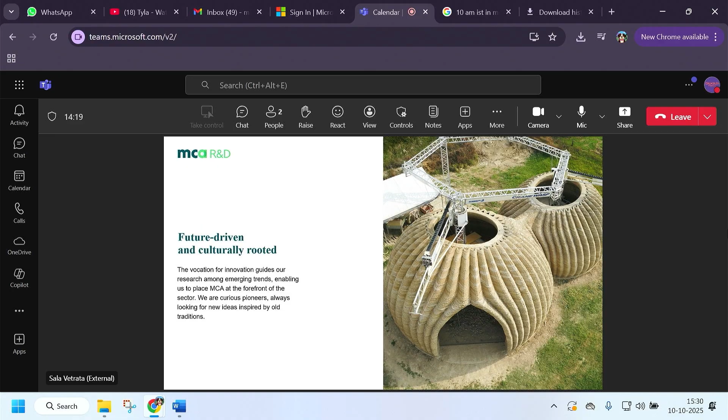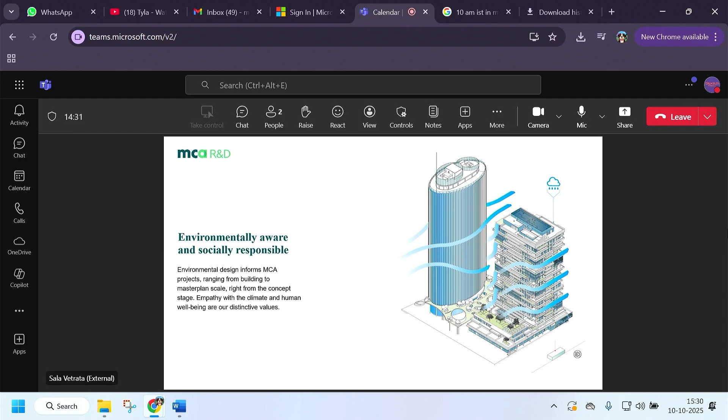Of course, one other main part of our work inside the unit is to make all the environmental analysis and all the integrated design that we need when we design buildings and master plans in our cities. So in that sense, we can say that inside the office, the research informs projects. So we help our colleagues that are working on projects, and in a sense, the projects are inspiring us for new research. So it's a continuous loop where we work with the others in order to increase the potential of our design.

Let me show now some projects that we developed in the last year, and I think that we can go deeper in what I said at the beginning. So the creation of an ecosystem with a sort of biodiversity of buildings. The first one is Tecla. It is a project developed together with WASP, an Italian company that produces 3D printers, and it was developed across the COVID in 2020. It was a prototype.

And to do this, we started by taking a look into what, at the time, all the research and the research institutes were saying, so that thanks to 3D printing, we can reduce the time, reduce the cost of our building, having more flexibility in terms of design, reduce the waste, and of course, reducing emissions and injuries. So everything was showing us that potentially this could be a technology for reaching the zero footprint of our buildings.

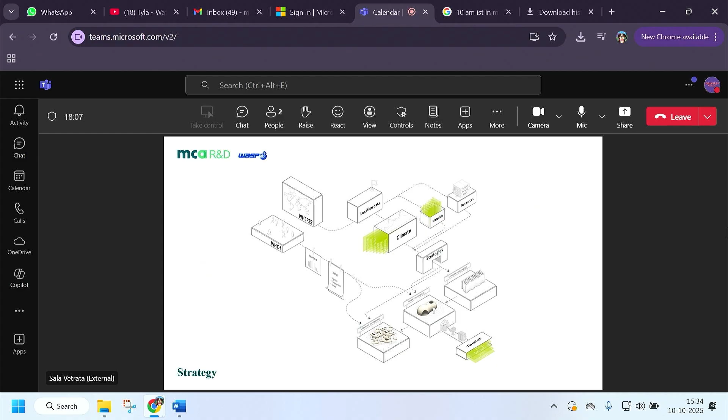By using the location, we extract the climate, the materials, and the resources that we can find in the context. And with this, we develop strategies. With all these strategies, we develop a bottom-up solution that, starting from the wall, can arrive at a final master plan.

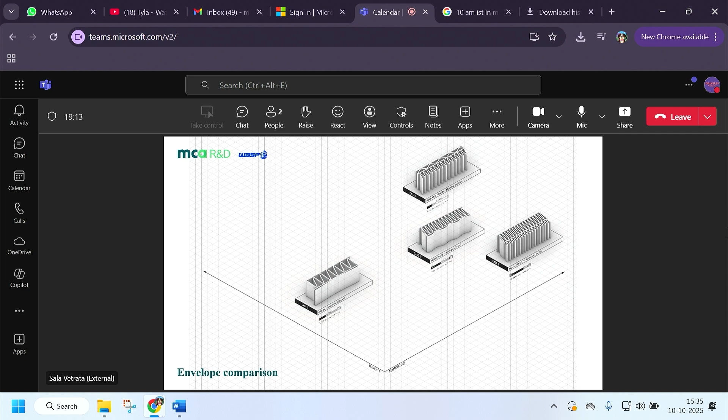So together with the students of SOS, we started imagining how this algorithm can work in different latitudes and different climates. And as you can see, we start with these 4 initial contexts, and together with the students, we developed these 4 different solutions. So we customize the envelope of the building in order to stay in contact with the communities and the different weather. So by using the same technology, we designed 4 different types of wall in order to face different conditions, and we arrive at the case study of Bologna.

So one of the 4 initial contexts was Italy, and we decided to start with this initial mock-up of a house. So we start with the primitive surface that is the result of FEM analysis, and we use this primitive surface in order to make an irradiation analysis on it and understand where it is needed to corrugate the surface in order to create self-shading on the envelope.

So thanks to this, we designed a shape that is something like a human skin. So it's a multi-performative skin that can protect us from rain, protect us from the sun, and having inside it this system of natural ventilation that can help in reducing the heating effect during the summer and reducing the moisture inside the wall during the winter.

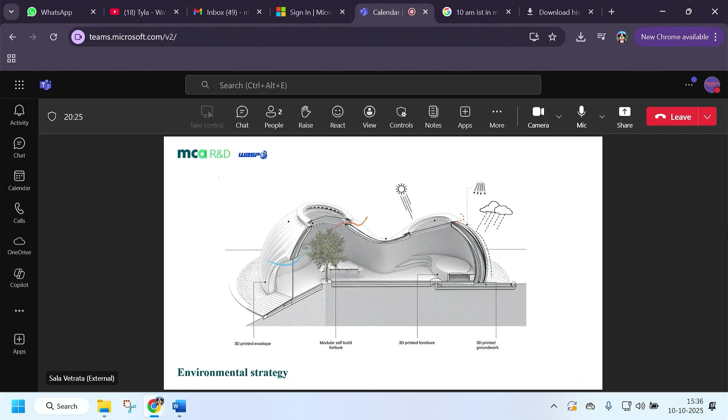Okay, so those are some renders at the initial stage, so how it could look if the whole process works. And here you can see how we manage all the materials that are composing the house, because you need to consider that it's potentially possible to use 3D printing for everything. But in our case, we decided to use 3D printing just for the external shell.

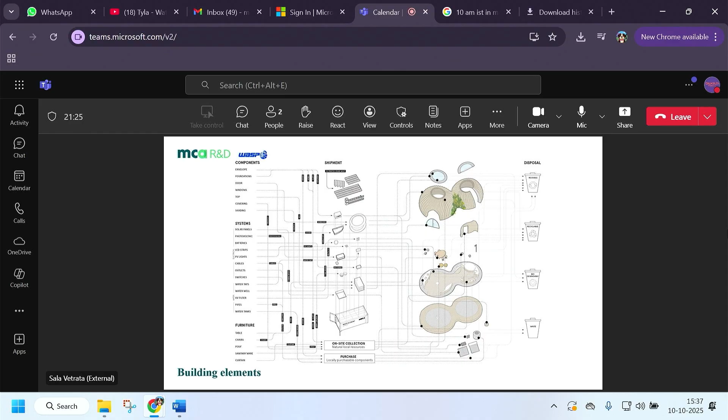The whole ecosystem of systems, the electrical system, the water piping, and all those parts are connected and embedded inside a container for the transportation. So all the windows, roofing, and everything can potentially be moved inside the container. So you can consider that we have a sort of high technology part, the system part, and the low technology part, the shell.

So we need a paste, a fluid paste that can dry without cracking. It was a little bit tricky, but by adding silica sand, we managed a good printability paste.

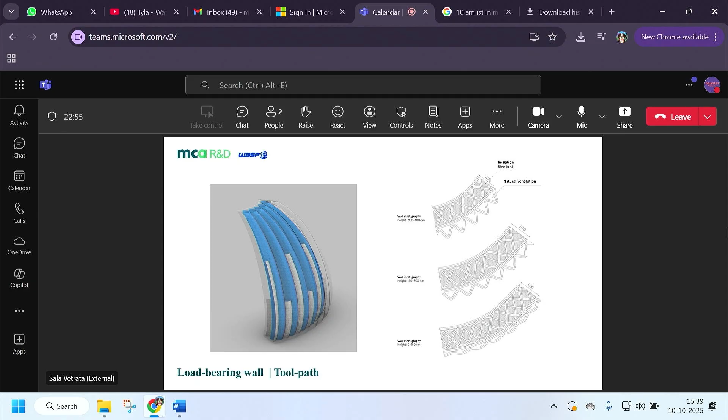Here you can see the structural system. All the white parts on the left are not considered in the structural analysis because the structural part was only the blue ones. As you can see on the right, section by section, from the bottom to the top, we removed some part of the printing path in order to reduce the weight of this wall. And this allows us to reduce the stress on the initial part of the wall.

Here we have the analysis that we performed in order to understand the deformation during the printing process, because the process is quite long, it took something like 3 weeks. It was the first test, but we need to understand the deformation that we can have along the process in order to predict it and avoid it.

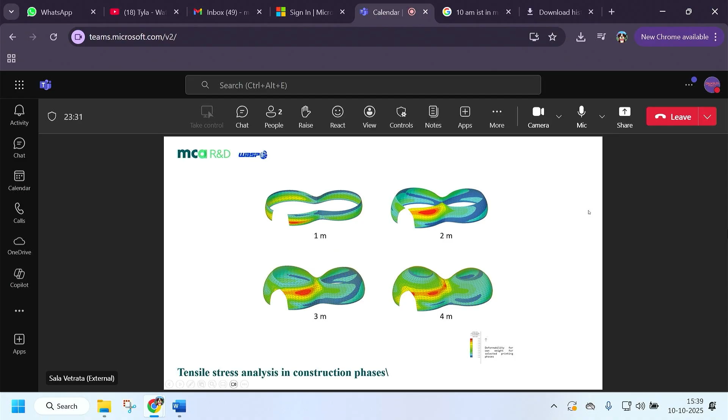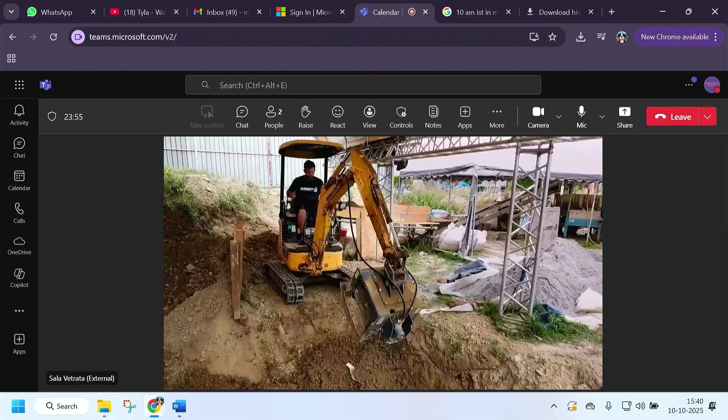So here we have a video of the building site phase. As you can see, we used 2 machines able to print together. So a lot of work was done in order to have a shape that can be printed by these 2 WASP machines. The work was quite challenging and tricky because it was the first time, in 2020, that 2 machines printed together outdoors in real environmental conditions.

And here you can see the roughness of the material, which is earth dug out from the building site. And here we have a time lapse of the building. These are some of the most critical parts of the building site. Here you can see the biggest amount of material was soil, considering that we used something like 60 cubic meters of soil for 200 hours of printing.

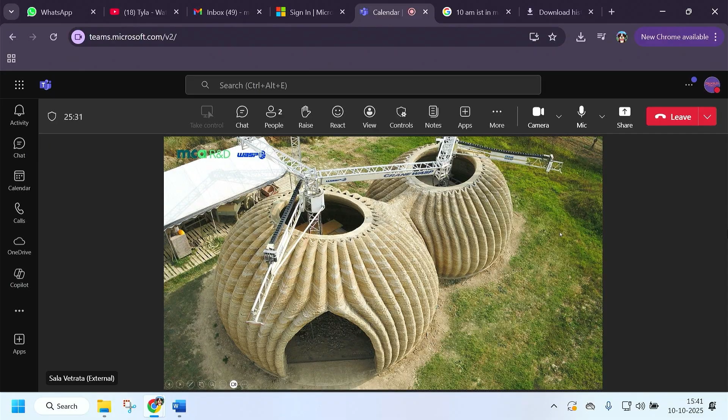Okay, and here we have some images of the final part of the process and the completed mock-up with windows, doors, and all the furniture inside. Here you can see the lighting system that we designed in order to create a more comfortable space inside.

And we just put a tree inside the space in order to show the connection with the earth. So after this project, we decided to take a little bit of time in order to understand how we can use these technologies in different contexts.

At the time when we started with Tecla, the challenge was having bigger machinery able to print on site, to build big buildings, and having something that can be monolithic on the site. But we have seen that having machinery like this could be a very big effort in terms of energy and in terms of space. In some contexts that we have with other clients we are working with, it's not possible to set up a machine like this and cover the whole time of the printing inside the building site.

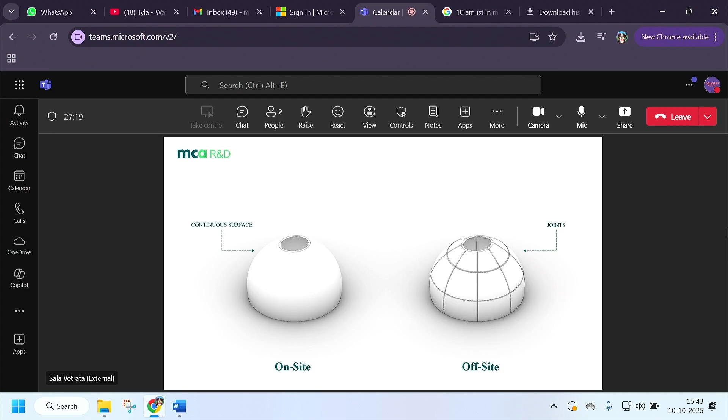So for this reason, we started trying to understand how we can split an architecture into parts in order to be potentially built off-site. Because just splitting the surface and cutting it is something that can affect a lot the aesthetic of the building. For this reason, we decided to start understanding a little bit better what happens when we are printing something.

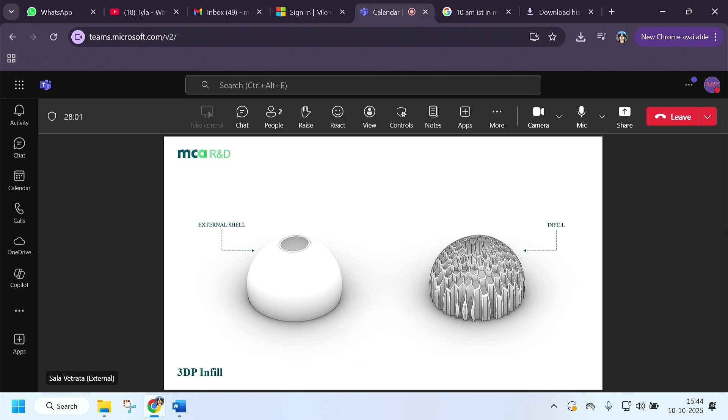If we take a look into a 3D printed material, we needed to know that inside a block of 3D printed material there could be different percentages of material. So there are patterns that are composing our material. Our material is not filled with a dense part, but it's filled with this kind of geometry. So we started to imagine how it could look if we remove the external shell and the internal shell and show the infill of our 3D printed element.

For this reason, we started trying to understand how an architecture looks that is mainly based on geometry like this, on the 2D patterns, and we're trying to find a way to create blocks based on this pattern, able to be used as a sort of interlocking system, a brick system. We discussed it internally with the architect Mario Cucinella and with Buro Milan for the structural part. He's one of our partners.

And we know that some of the biggest buildings in the world made in ancient times are made of bricks. So why can't we use 3D printing to make a new kind of bricks that can help us build without using glue, creating a dry assembly object that can be modified with no new material over time? So creating something really adaptable over time.

And why do we use 3D printing? We use 3D printing because it's the cheapest solution for an architectural office to test new geometry in the physical world. In that case, we tested this initial stage in just 1 week. This is ceramic, so we fire this ceramic and we use these new bricks in order to test the junction system. After 1 month, we had the full scale blocks and we tested at the real scale. We are speaking about blocks of 60 centimeters, and we tested the structure at this scale in the lab.

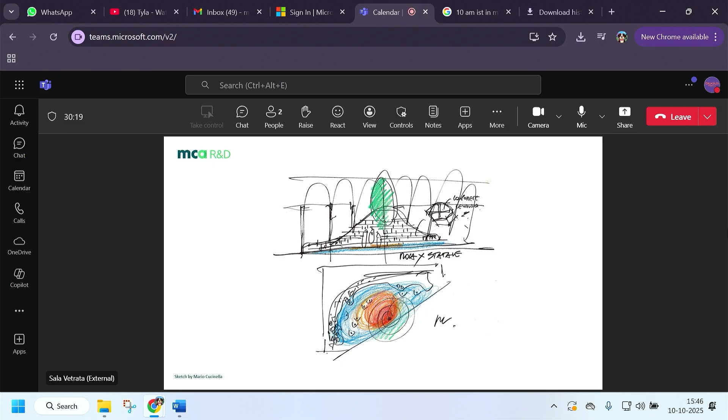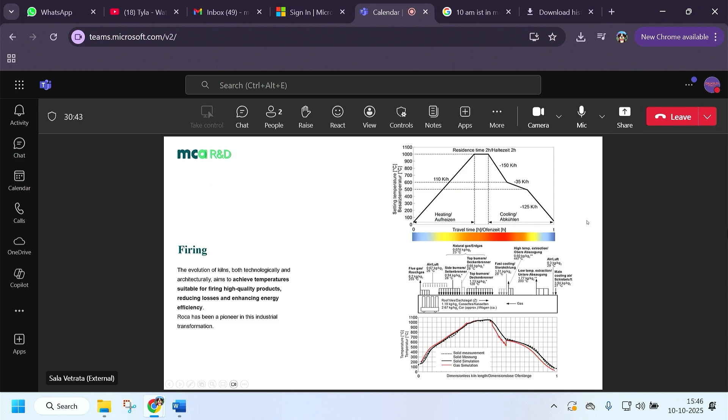The first opportunity to use this new approach of 3D printing was the Milano Design Week of 2024, when we had the opportunity to design for the Roca company an installation showing people a very big innovation made by the company. They created a very new electric kiln for firing ceramic. One of the main features of this kiln is that they can control perfectly the temperature curve inside the kiln. So what we have done is to design and materialize this temperature curve in order to show people the process of ceramic firing.

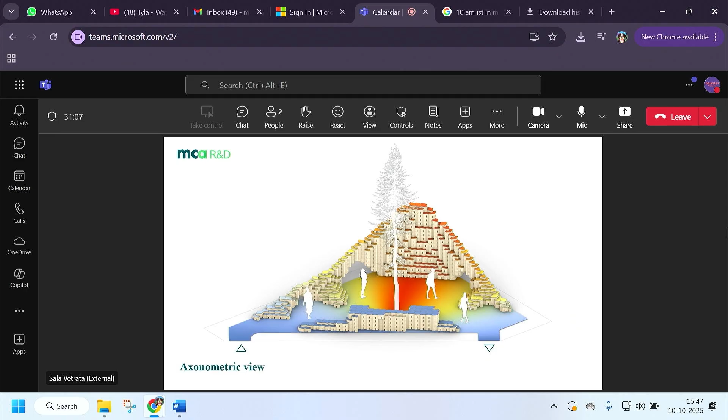So we recreated this curve inside the space in Milan, and we materialized this curve with the blocks that I showed you. To make these 1,200 blocks, we used recycled ceramic, so 50% recycled ceramic and 50% raw ceramic. And we printed all these blocks. As you can see, we used them like Legos, and we assembled these blocks in less than 1 day on the building site.

So it's a very big difference in terms of use of printing, because we spent the whole time in the warehouse printing the blocks, something like 1.5 months, and we assembled everything in just 1 day. As you can see, everything is made with the same type of block. Thanks to this, Roca reused the same material for 4 different exhibitions. Usually in exhibitions, the material is destroyed every time after the exhibition. But in this case, thanks to this design, they reused the material 4 times.

One other project that I want to show to you is Un Fiore for San Servolo. It is on the San Servolo Island in Venice, and it was done in the southern part of the island, one of the most unused parts of the island. And basically the idea was to reappropriate and retake the nature inside this space.

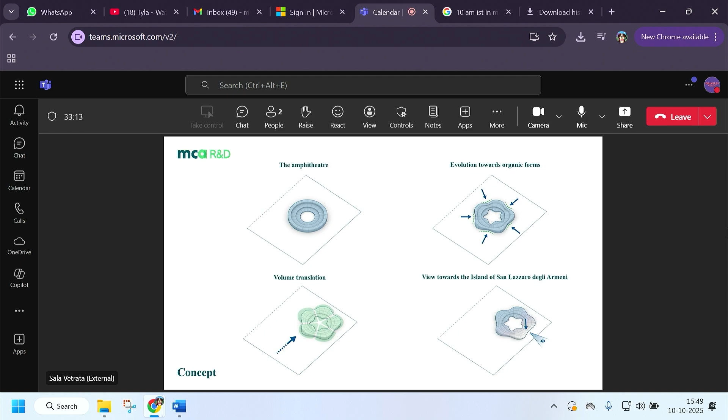It is a football pitch, unused. And basically, the idea of the municipality was to use this space for art and cultural events. So they wanted a sort of theater in that part of the island. For this reason, we started from the amphitheater shape, and we tried to play a little bit with it in order to create a more organic shape, and on one side to create a sort of perspective cone that can help us take a look at the island of San Lazzaro degli Armeni.

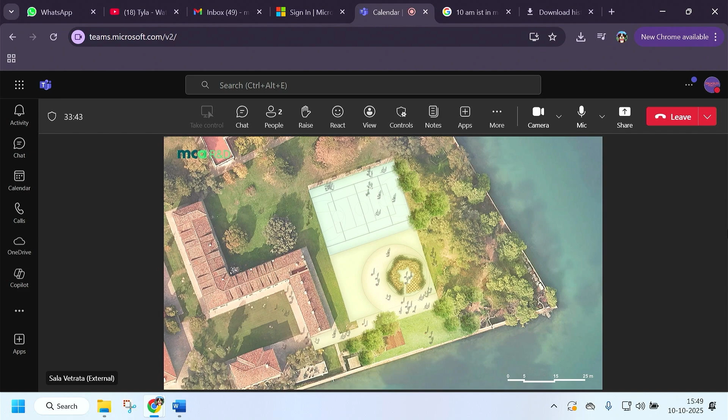So here you can see a 2D representation of what happened. We used just half of the football pitch, and we created this cultural space made of blocks. But you can imagine that producing custom elements on the island is quite complex due to all the costs and all the issues of transportation on an island in the Venice lagoon. So for this reason, we decided to split it into blocks and to print all these blocks on the island.

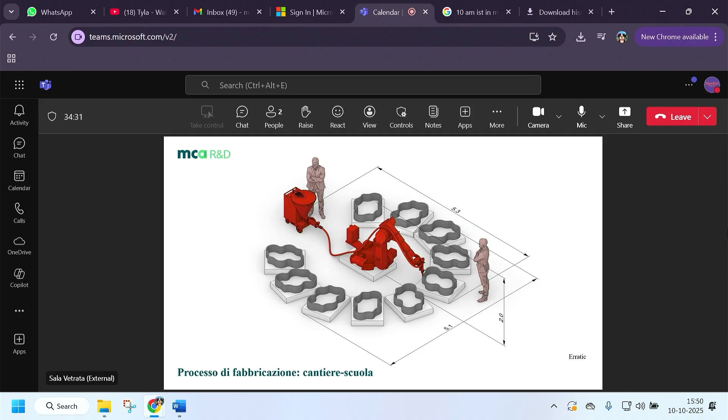For this case, we don't use raw earth, we don't use ceramic, we use lime. Why lime? Because it's one of the oldest materials used in the Venice lagoon. It is the material they use to connect bricks together, so it resists really well the salt and the moisture of the space. And we shaped these blocks to have more stability during the printing process, because during printing, having really aligned walls could be an issue.

So here you can see the printing phase on the island. We set up the machine on the island, a 6-axis robot, and we printed all the blocks, 700 blocks on the island. Here you can see the first test that we did. Here you can see the stocking place where all the pieces were stocked, and some assembly moments on the building site where we put it all together.

This was the initial render of the installation, and this is the result. Not the final result, it is a work-in-progress phase. Those are some images of the final results, in the night view, with the grass and plants inside. And this is the final stage, a couple of hours before the opening of this installation for the island of San Servolo. Here you can see why we designed this opening, in order to show the lagoon and the island of San Lazzaro degli Armeni.

The last project I want to show to you is a similar project we developed for Arte Sella in Trento, in the north of Italy, in the Alps. This project was done as a sort of answer to the Vaia storm that destroyed part of the ecosystem a couple of years ago. So we decided to create a discrete landscape that can protect people inside this art park in the Alps.

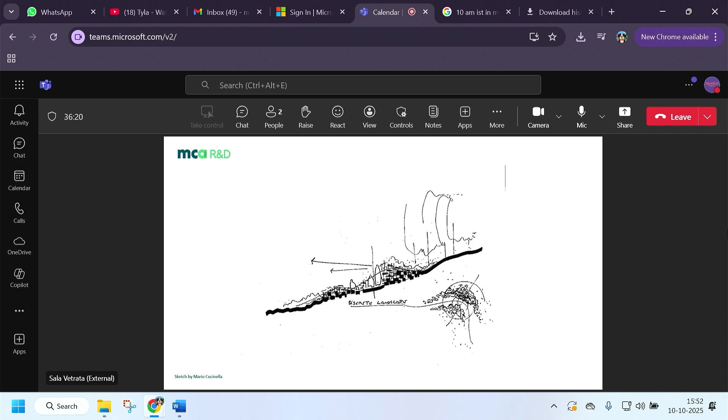So we designed something that can be done using local material, like the material produced by Calchera San Giorgio, a local company that produces lime, and Erratic, a company that works with robots very close to the building site. So we started working and testing local aggregates with lime, and we shaped these kinds of basaltic elements that grow from the soil in order to protect people inside the park.

So here you can see some images of the final stage, fully designed and fully printed. It is composed of 500 blocks with 57 different block types. Here you can see how we connect the architecture with nature. The idea is to reconnect our work with nature, and potentially in the future, these elements will become a part of nature. Here are some details of the building, and as you can see, the color of the blocks is very similar to the color of the soil, because the material is composed of 40% natural aggregate.

So yeah, that is all. Thank you for your attention. I hope that I have shown you some interesting projects from our studio and our experience in the field of 3D printing.